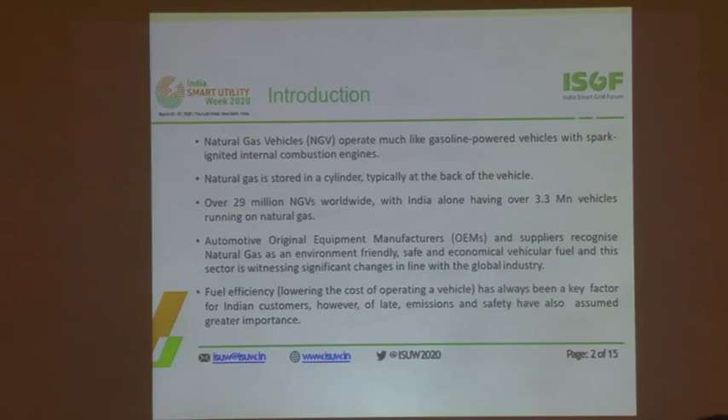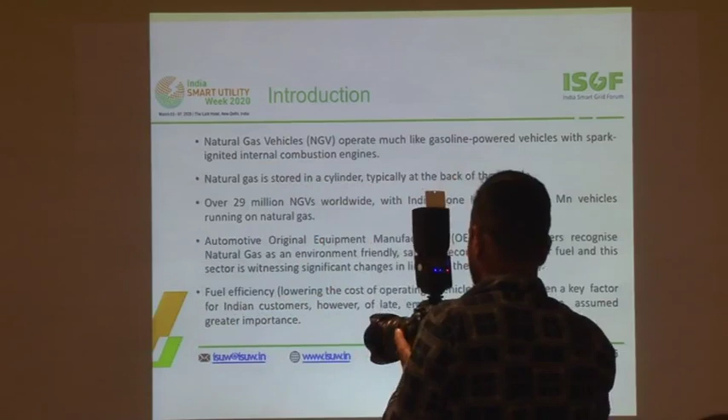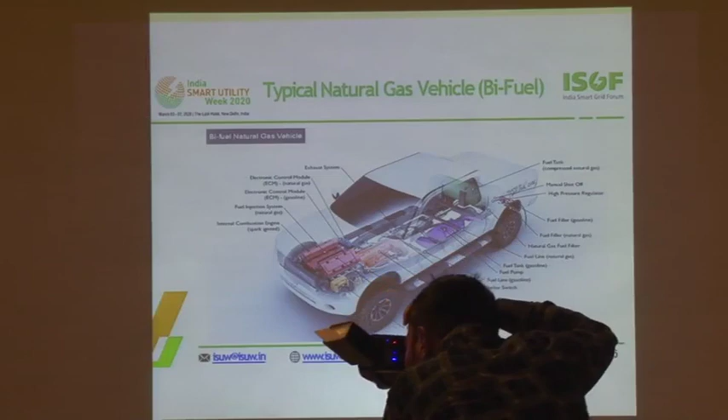Fuel efficiency, lowering of cost of operating a vehicle has always been a key factor with Indian customers. However, of late, emission and safety have also assumed great importance in NGV and CNG usage. So this is a typical NGV vehicle, bi-fuel vehicle, where you have gasoline as well as natural gas available in the system.

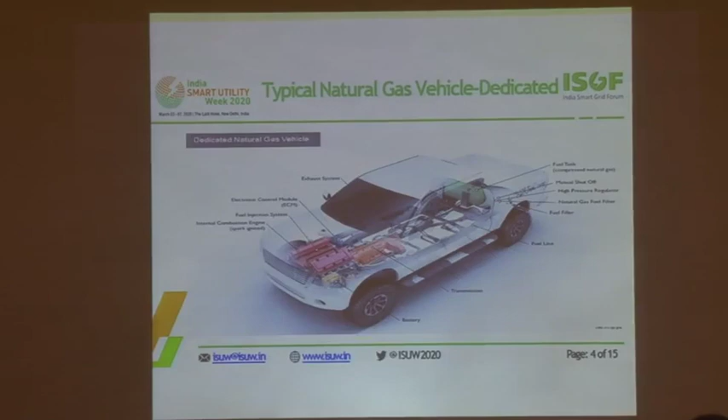If you see main components, this is a dedicated NGV vehicle which does not have the alternate fuel. The key components of NGV refer to high pressure regulator, ECM, CNG filling receptacle, CNG injection system, high pressure CNG cylinders. These are some of the components of the NGV.

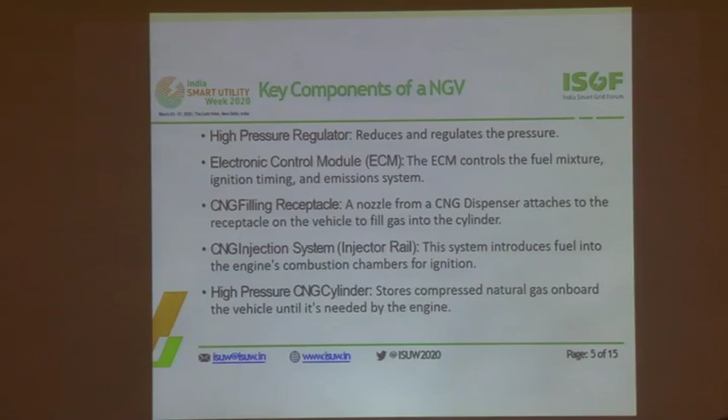This is a typical diagram where gas flow is indicated. We can see the CNG cylinders there. It is coming here, air intake is there, and air fuel mixture is happening. So this is typical where the pressure is also reduced from 200 bar in two stages, then it comes to 1.2 bar, then it gets mixed there.

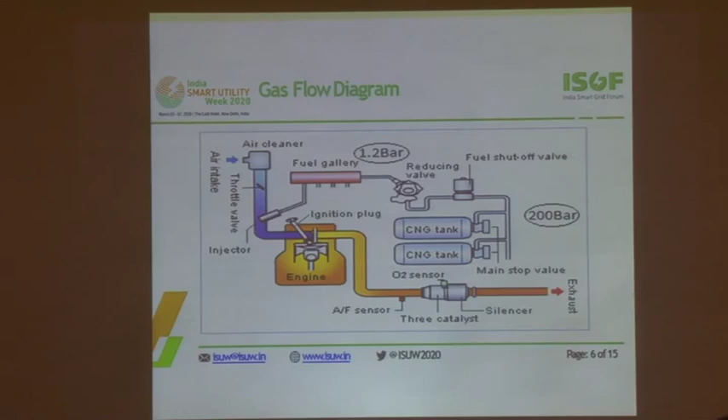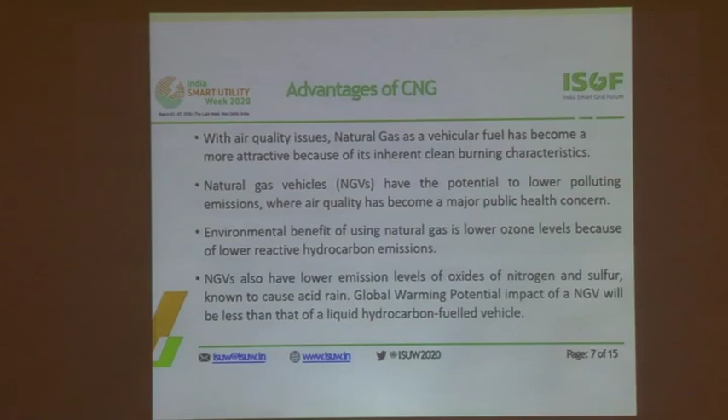We all know the advantages. With air quality issues, natural gas as a vehicular fuel has become more attractive because of its inherent clean burning characteristics. NGVs have the potential to lower polluting emissions, where air quality has become a major public health concern. NGVs also have lower emission levels of oxides of nitrogen and sulfur, known to cause acid rains. Global warming potential impact of an NGV will be less than that of liquid hydrocarbon fueled vehicles.

To add on the other advantages, there is 77% less particle emission than a diesel car, 11% reduction in CO2 emissions, 90% less nitrogen oxides. It's economical as compared to petrol and diesel, less wear and tear on engines, and with the recent introduction of biogas, that same biogas can also be used in these vehicles. That's an added advantage. CNG is suitable for all segments - car, bus, trucks.

Of course, in today's scenario in India especially, you don't have luxury cars running on CNG, but all other mid-segment vehicles are on CNG.

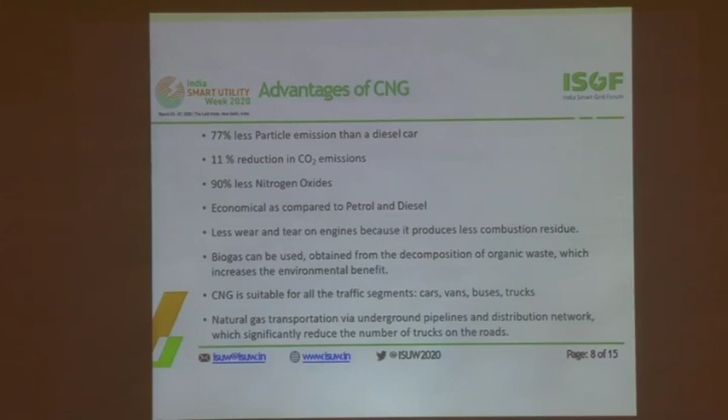And the other advantage with natural gas transportation - mainly it is done through pipelines, so it does not have to be moved by road tankers, and thus it reduces the number of trucks if you consider diesel and petrol tankers moving around. With the pipeline transportation system, it is not required. So that is one of the advantages one can say.

Lightweight vehicles are in demand these days and will retain their growth in the coming years, because today 70% of the geographical area has been allocated to CGD entities for creating the infrastructure.

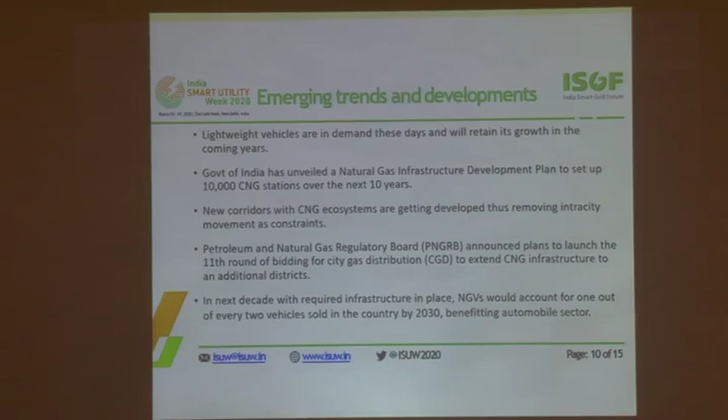NGV by 2030 may achieve 50% sales penetration of natural gas vehicles with infrastructure in place. If we really look at 10,000 CNG stations coming up in another 10 years, then probably the volume of 50% sales will be achieved.

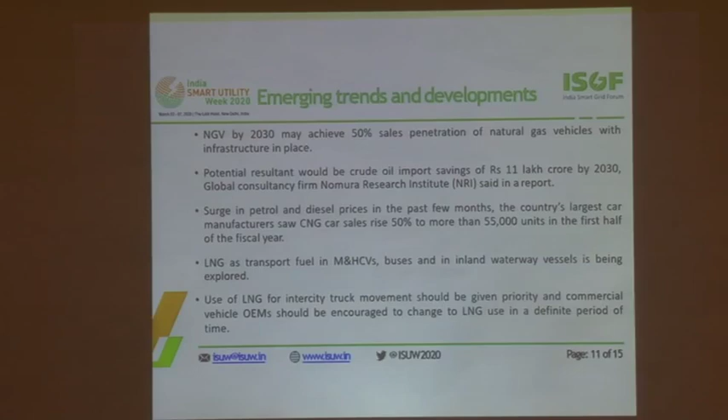The other option being explored, and which is a reality also, is LNG as transport fuel in medium and heavy commercial vehicles, buses, and inland waterway vessels. Use of LNG for intercity truck movement should be given priority, and commercial vehicle OEMs should be encouraged to change to LNG use within a definite period of time.

Technologies and equipment options: natural gas vehicle technology allows for varying levels of fuel flexibility. A dedicated natural gas vehicle is only capable of running on CNG. The other one is the bi-fuel vehicle.

The dedicated CNG vehicle, as mentioned, has a constraint of moving between intracity regions. So the bi-fuel vehicle is a better option as of date, and it is being used more frequently by people.

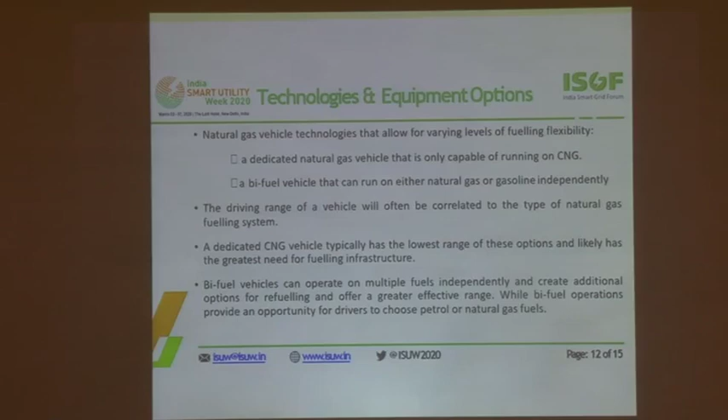A dedicated CNG vehicle typically has the lowest range of these options and likely has the greatest need of fueling infrastructure. A bi-fuel vehicle can operate on multiple fuels independently and creates additional options for refueling and offers a greater effective range, while bi-fuel operations provide an opportunity for the driver to choose between petrol or natural gas.

Sequential CNG kits are introduced to match the performance of EFI and MPFI cars by delivering computer-controlled CNG gas injection through nozzles. By product type, the market has been segmented into OEM and car modifications.

OEMs are focusing on factory-fitted CNG vehicles and have been lobbying with the government to promote such vehicles. The car modification segment accounted for the largest share of the market so far and is expected to remain the largest as well as the fastest growing segment in the coming future.

So basically in India we had a large retrofitting market, and it is still there. Now with BS6 vehicles coming, we need to see how that market is going to respond to it.

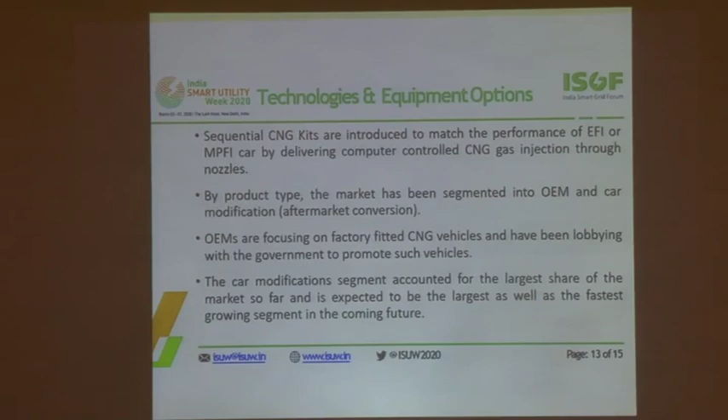If we really look at the challenges and issues: only a few vehicle OEMs produce factory-fitted CNG vehicles, there is a huge price difference between a factory-fitted CNG vehicle and a retrofitted vehicle, and the cost of CNG conversion is high.

If we really look back at the late 90s when CNG came to India, the cost of the kit was probably the same as it is today. So there has not been much development in terms of kits, and retrofitting cost remains the same, more or less around 40,000 or so. With BS6 coming in, probably that retrofitting cost will increase, and that may go somewhere around 70,000 to 80,000.

Thank you, sir. Thank you.